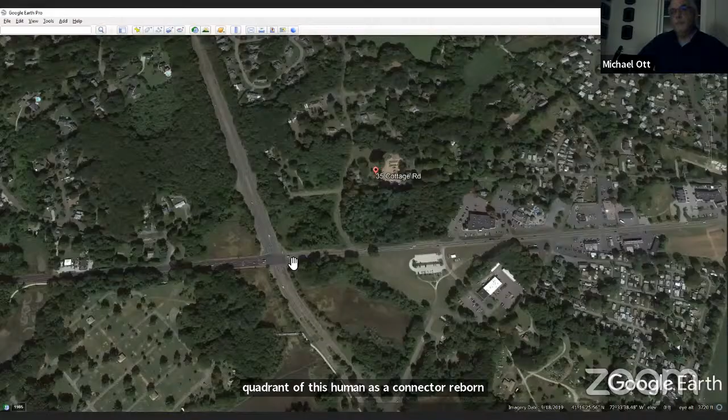And then there are small areas of tidal wetland to the northwest, in the northwest quadrant of the Hammonasset Connector Route 1 intersection. And there's another small one here. Let's see if I can zoom in a little bit. So there's another small wetland here in the northeast quadrant of this intersection. And the reason I'm pointing this out, and this is in our report, the municipal storm drainage system within Mill Road and within the westerly portion of Cottage Road actually discharges to this tidal wetland here.

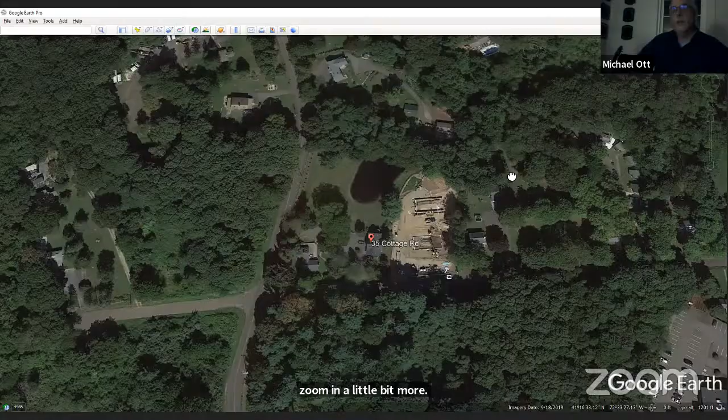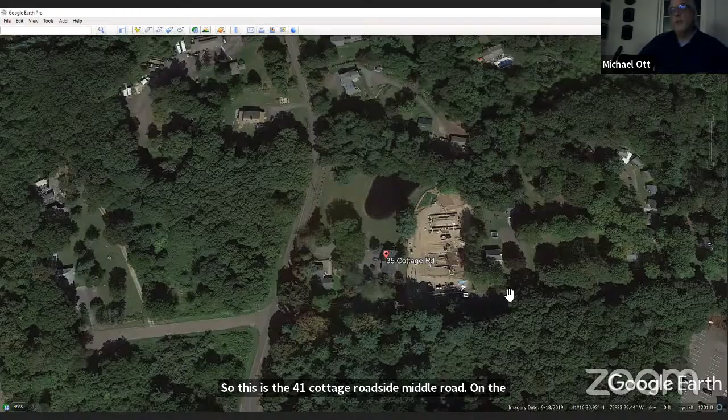So if I zoom in a little bit more, hopefully you can see this clearly. It looks like this aerial image was taken when the development at 35 Cottage Road was under construction. It looks like the foundations were in at the time, as you can see, of the two buildings. So this is the 35 Cottage Road site, Mill Road on the left, Cottage Road, hard to see with the tree canopy, but Cottage Road right and left across the bottom of the screen. This is the existing home. It was a home at one time, later an office on the site, and this is the existing garage and office on the site. Those two buildings are still there.

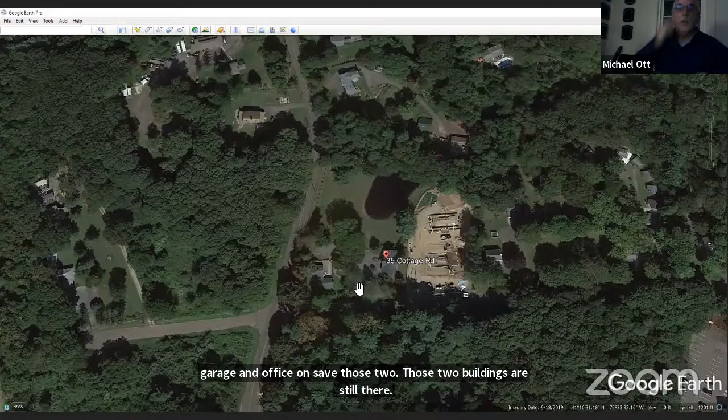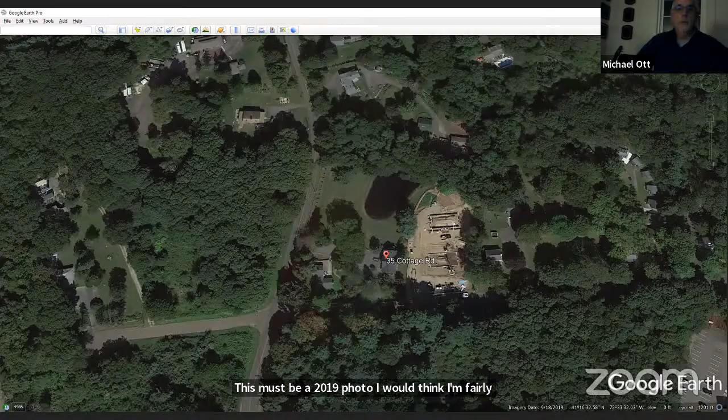So this must be a 2019 photo, I would think. I'm fairly sure. So I'm going to switch screens, and hopefully you'll be able to see the switch without me stopping sharing and resharing. Can you see the plan set now on your screens? No? Okay, let me stop sharing and do it again. I think that'll solve it. How about now? Yep, okay.

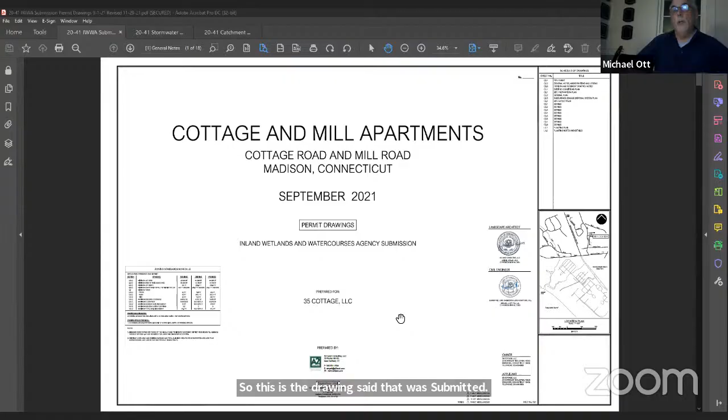So this is the drawing set that was submitted. It's the latest set, revised to November 29th. I'm going to go to the existing conditions plan.

Mill Road on the top, left and right on the top of the sheet. Cottage Road up and down on the left side. If you continued up Cottage Road, that's the westerly extension that almost goes to the Hammonasset Connector. It used to go over to Signal Hill Road before the connector was constructed. If you followed Mill Road to the south, you'd come out at Route 1, and the entrance to Hammonasset would be diagonally to your right as you sit at Route 1.

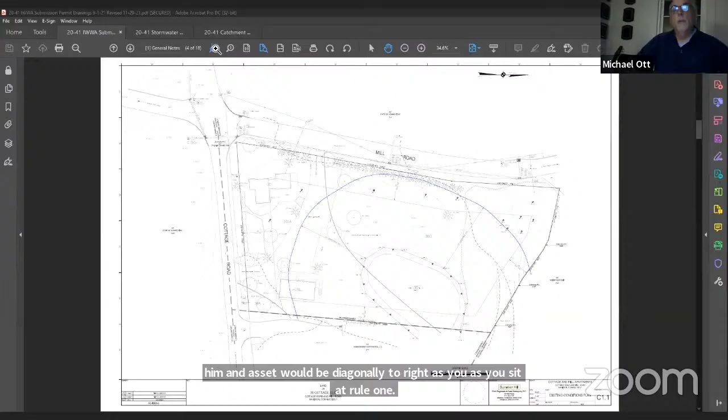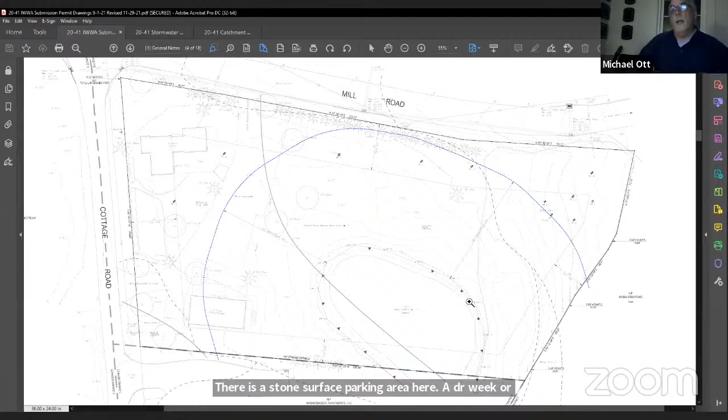So the site, I think you're all familiar with it. This is the previous home that later became an office, this is the garage office. There's a stone surfaced parking area here, a driveway curb cut on Mill Road, a driveway curb cut on Cottage Road, and the pond on the property. The surface area of the pond at its high water elevation is about 12,000 square feet.

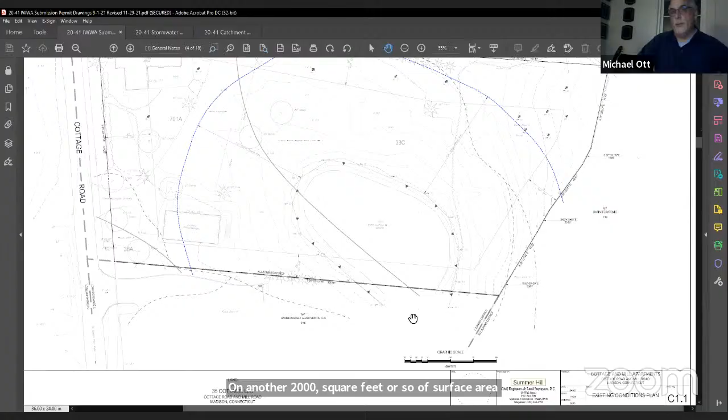Another 2,000 square feet or so of surface area at high water elevation is located on the 41 Cottage Road site. So the property boundary between the two sites cuts across the pond, as you all probably know. The pond, to the best of our knowledge, is an excavated pond. In talking to the previous owners some 30 or so years ago, they simply excavated and intercepted the groundwater table.

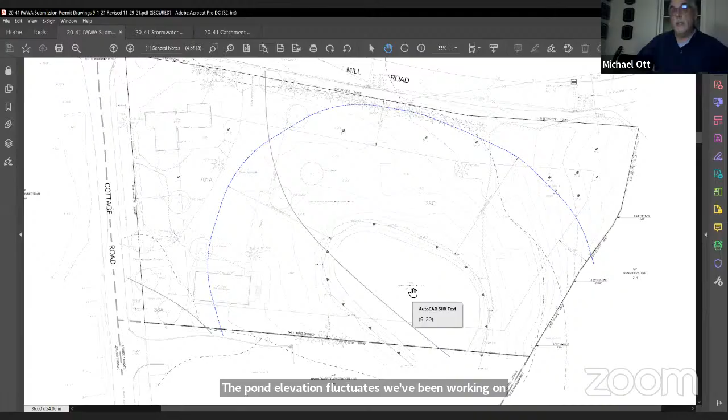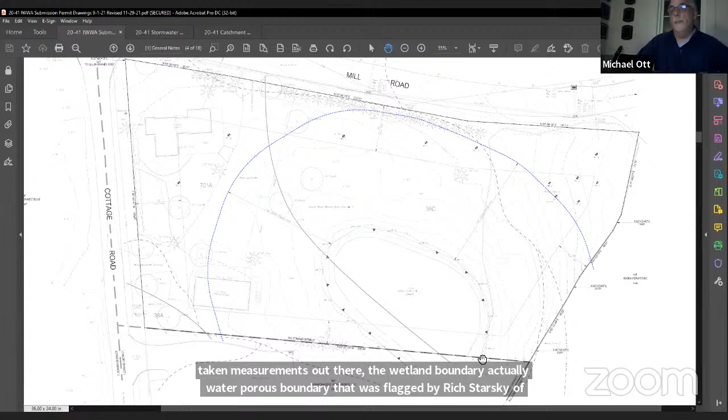The pond elevation fluctuates. We've been working on these two sites for the past 3 years now, and we've seen the pond as low as elevation 3 and as high as elevation 5 at different times that we've taken measurements out there. The wetland, actually watercourse boundary that was flagged by Rich Snarsky of New England Environmental Services, is actually the high water elevation of the pond. It's pretty readily seen just walking onto the site, pretty obvious where the normal high water elevation is.

The total parcel area is 1.94 acres. Some letters from residents have indicated the property is 1.1 acres. I think that's just confusion, because in my report I noted there's 1.1 acres within the 100-foot upland review area limit, which is this blue line. So the total area of the site is just under 2 acres.

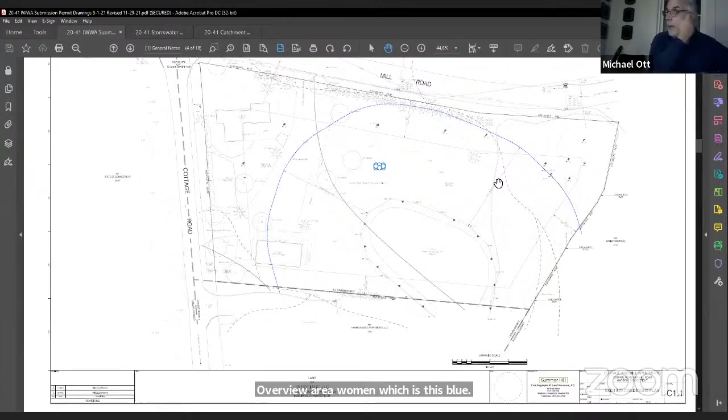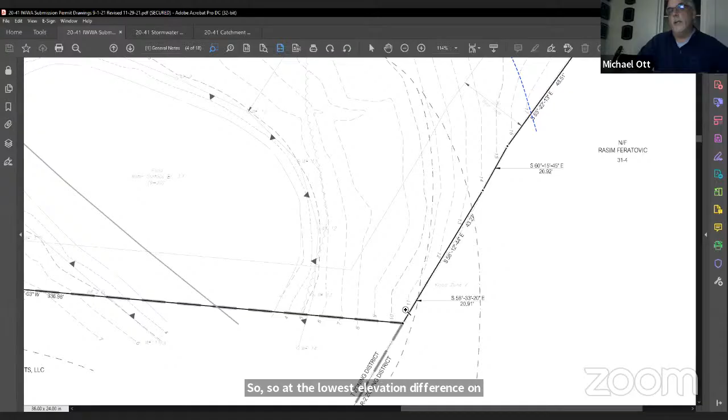The site, and I studied this again today, and walked the site again last week, the surface water runoff is completely contained on the site. No portion of the site drains off-site to Mill Road, to Cottage Road, to the 41 Cottage Road site, or to the 42 Mill Road residential home to the north. So surface water runoff is completely contained within the site. If I zoom in here, you can see with the high water pond elevation of 5, the lowest elevation in this corner here is about 11.

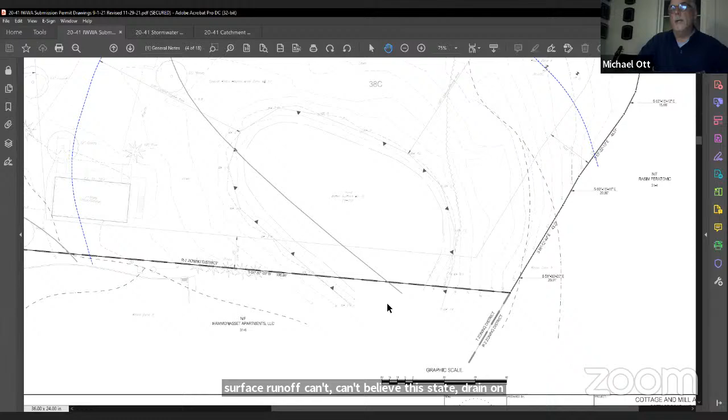So at the lowest elevation difference on our site, the ground surface is 6 feet above the high water elevation of the pond. Similarly, although we don't have the topography yet, we will shortly, on the adjacent 41 Cottage Road site, by my inspection last week, this topography continues and the site is much higher than the pond. So surface water runoff can't leave this site and drain off-site to the two roads or to adjoining properties.

So I'll try to make this quick. I know you've heard this before, but as Attorney Shansky said, it was not in the context of a public hearing, so I guess we have to go through this again.

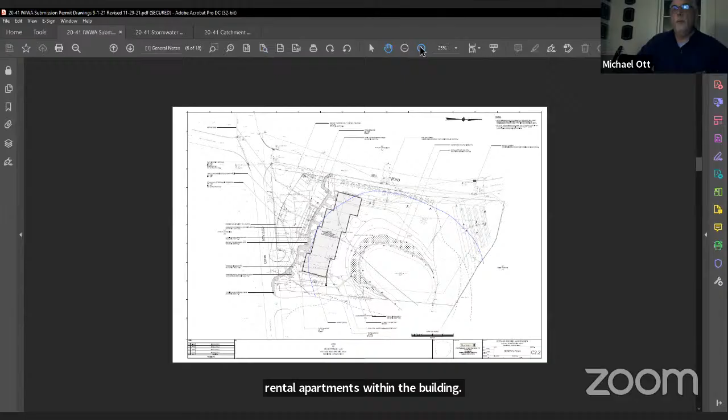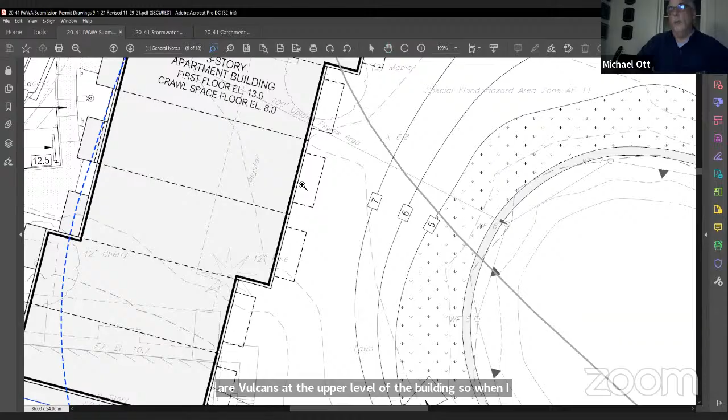The proposal, as you know, is for a single 3-story building. The footprint of the building is, in round numbers, 7,800 square feet. There will be 18 one-bedroom rental apartments within the building. The face of the building is at its closest point 50 feet from the watercourse boundary. These dashed lines are balconies at the upper level of the building. So when I note the 50-foot distance, I'm talking about the face of the wall, the building proper, at its closest point, 50 feet from the current watercourse boundary flagged by Rich Snarsky.

Parking area in front, 27 total spaces. Curb cut on Mill Road, curb cut on Cottage Road. Both of these curb cuts are very close to, or partially within, the existing curb cut locations. I'll go to stormwater management last, I think.

The on-site wastewater system is comprised of a very large septic tank, a wastewater effluent pump chamber, a sanitary vault that contains valves, and a force main that lifts the wastewater effluent up about 8 feet in elevation to a leaching field in the northwest corner of the site.

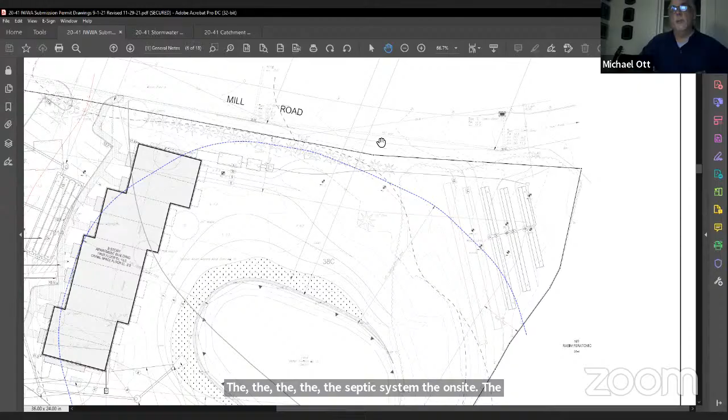The septic system, the on-site subsurface sewage disposal system, has been designed to meet the requirements of the State of Connecticut Public Health Code technical standards. It's considered a large system because it has a design flow equal to or greater than 2,000 gallons per day. The design flow here is 2,700 gallons per day.

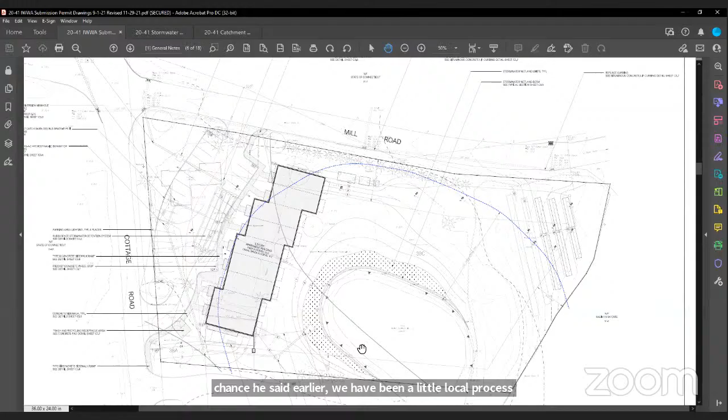Because it's a large system as the state public health code defines them, the local health department has to review and approve it, and then it has to be sent to the state health department for their review and approval. As Attorney Shansky said earlier, we've been through the local approval process, and the health department is now in the process of sending it up to the state health department for review.

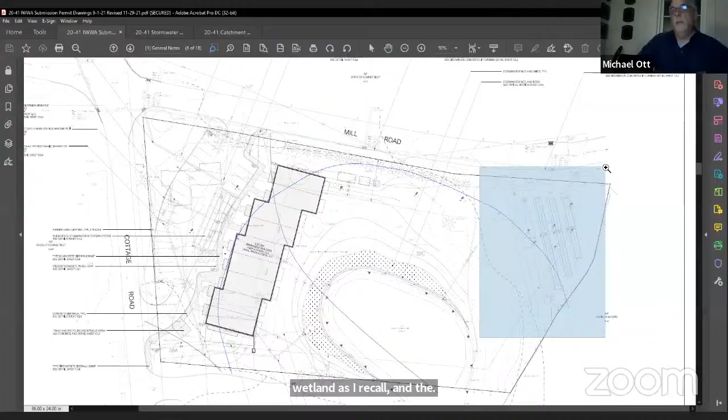The tanks are some 75 feet or so from the wetland, as I recall. The primary leaching fields—these three, with the lowest row being closest to the wetland—are, at their closest point, 92 feet from the watercourse boundary that Ridge flagged.

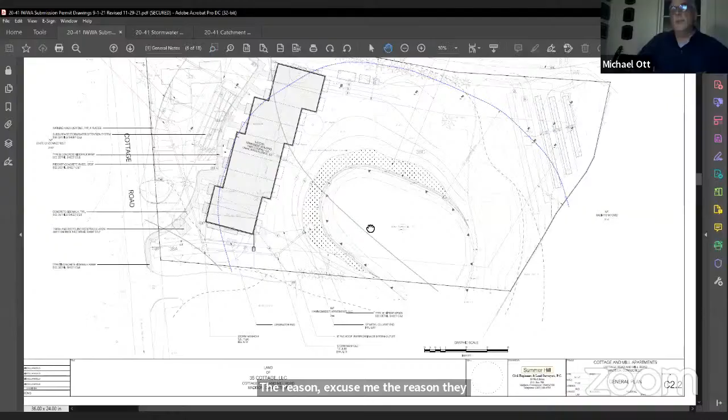The wastewater system is located in this corner to place it as far away as we could from the watercourse boundary, the pond edge, and to locate it where the best soil and groundwater conditions are on the site. After soil testing, including excavation of test pits, that turned out to be the right place to put it. So we've got it as far from the pond as possible, and in the proper location where the soil and groundwater conditions are correct.

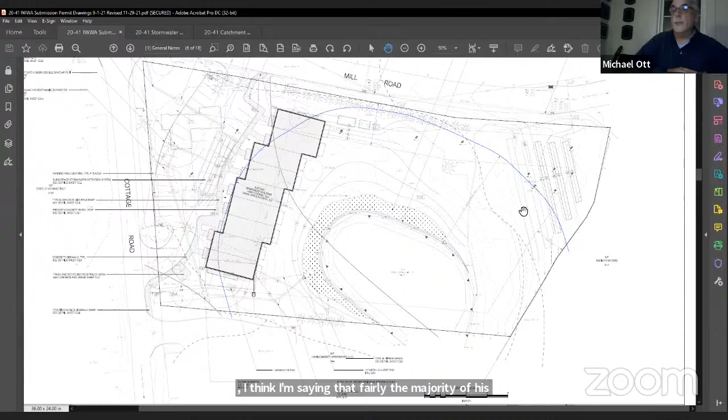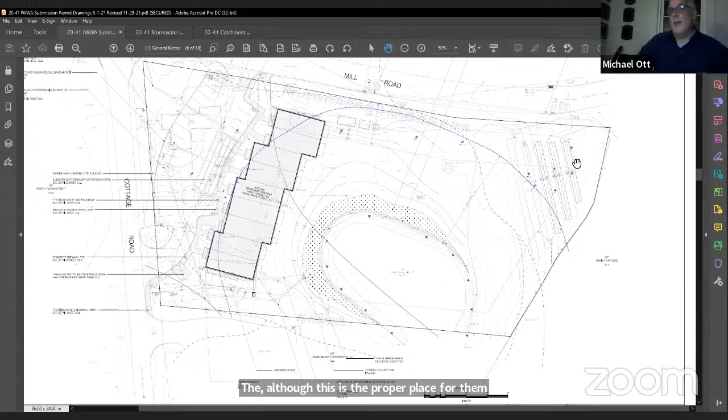Although this area is wooded, our landscape architect and environmental consultant looked at it, and the majority of the vegetation is invasive species, including a lot of ailanthus, or tree of heaven, as it's commonly known. The plan is to remove all of that, expose a nice-looking stone wall along the northerly boundary, and then replant the area in accordance with the landscape plans. So while this is the proper place for the septic system, a secondary benefit will be removing the invasive species and replanting this area.

There's an extensive landscaping plan, as you know, that Abigail Adams, our landscape architect, will go over, so I won't cover that.

The parking area is all limited to the front, on the Cottage Road and Mill Road side. There's a continuous sidewalk along the parking lot and the two driveways from Mill Road to Cottage Road, with small sidewalks at the building entries connecting out to the main sidewalks. The parking area is paved bituminous concrete with precast concrete curbing all the way around, and there will be exterior pole-mounted lighting for the parking area.

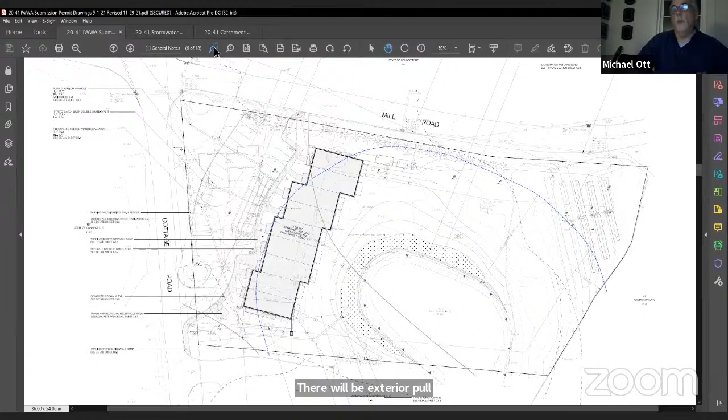I know some of this isn't really germane to wetlands, but I'm just trying to give you an overall view of the whole site proposal. What is germane, of course, is the stormwater management system.

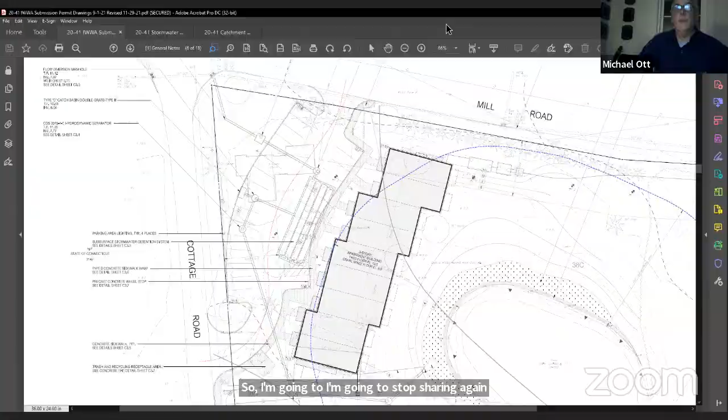So I'm going to stop sharing and switch screens. Hopefully you can see a different drawing now—this is a catchment area map. Can you see the change?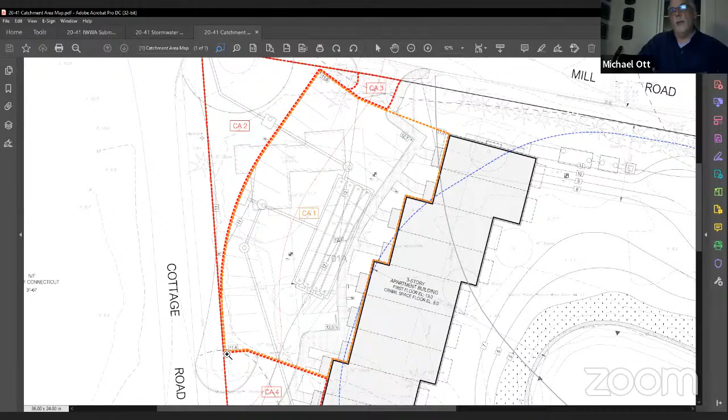This area outlined in orange runs to the building corner, along the face of the building, across the driveway, and then follows the curb line of the parking lot. So it's this total area, which includes the parking lot, the vast majority of the concrete sidewalks, and the small grass areas between the building and the sidewalks—about a quarter of an acre.

So that whole area, from the face of the building to the curb line of the parking lot, is connected and goes into the stormwater management system. This small area labeled CA3, which is only a few hundred square feet, drains out to Mill Road. And this, of course, is in the proposed condition.

So this piece of pavement of the driveway drains out to Mill Road, and surface water will go down the gutter and into this existing catch basin with the red circle around it. On the other end of the site, this area labeled CA4, which is bigger and includes the paved driveway, some lawn and landscaped area, some lawn here also, as well as this piece of sidewalk and this building entry roof, will drain out to Cottage Road.

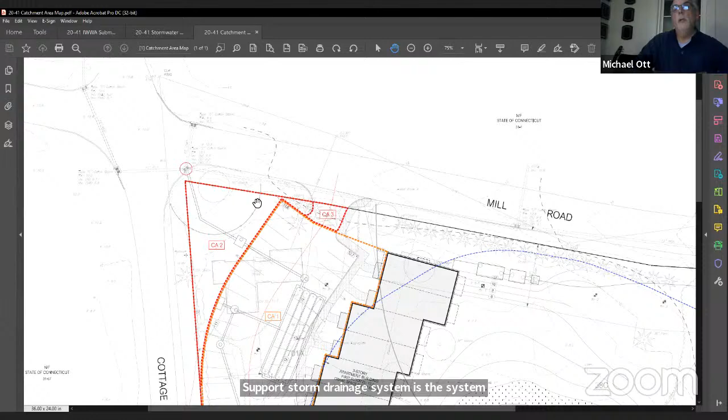The municipal storm drainage system is the system I mentioned earlier that discharges to the tidal wetland at the northeast quadrant of the intersection of the Hammonasset Connector and Route 1. That's why I pointed that out. So this municipal storm drainage system that's in place today discharges to that northeast quadrant.

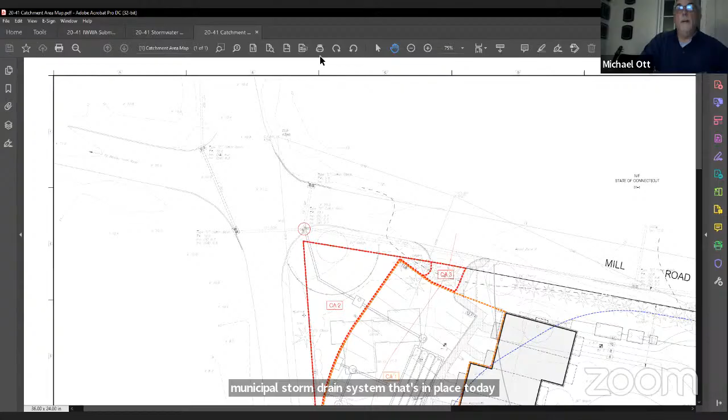In addition, this area, CA2, this sort of triangular area, which will be all lawn and or landscape plant beds, will also drain out to both Mill Road and Cottage Road and go into this catch basin.

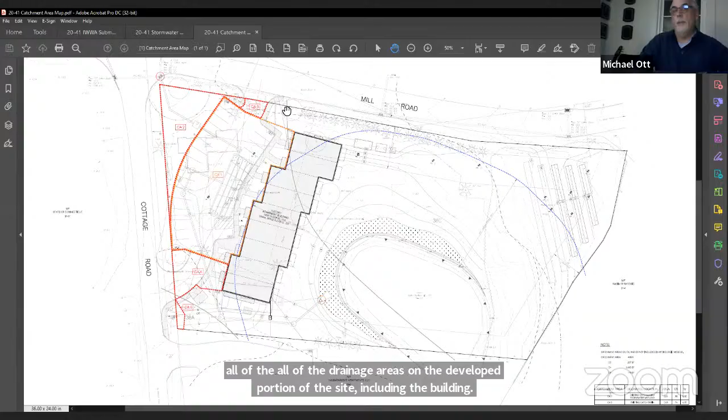So all of the drainage areas on the developed portion of the site, including the building roof, are relatively small. And when you model them in accordance with standards of practice, the hydrologic models indicate that the highest peak rate of discharge is a little over 2 cubic feet per second. And that's very low, a very low rate of discharge for development.

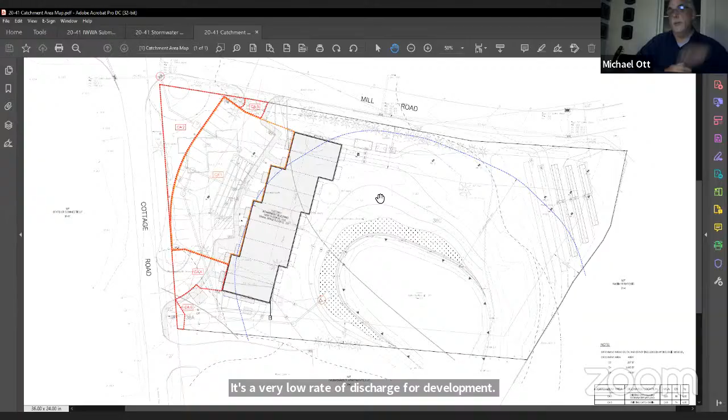It's just the rate of discharge and it's just the peak. But I want to give you a sense - if you look at the stormwater management report, you'll see that because of the small size of these catchment areas, the peak rates of discharge are very low, even for the 100-year event.

When we modeled the peak rates of runoff, we assumed that this whole orange area was paved. It's not, but as you can see, there are areas of grass here. We just assumed it was all paved, so it's a little more conservative.

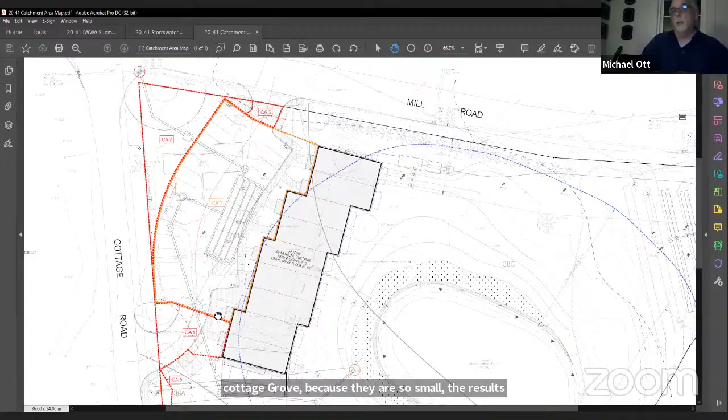And we did not model this little CA3 area or this CA4 area or this little lawn area CA5 that I forgot to mention also will go out to Cottage Road. Because they are so small, the results of the model are truly meaningless - the areas are so small they have no effect on the municipal storm drainage system.

So this whole large orange area is collected in this one catch basin in a single low point in the parking lot. When the stormwater leaves that catch basin, it goes into this manhole structure here, which is a flow diversion structure.

There are details for this on the plan, and in simple terms, what it does is it directs the water quality flow, a certain flow rate, this way to the right. So it comes out of the catch basin, goes into this flow diversion manhole, it hangs a right, and it goes into this manhole, and then it follows the storm sewer system down to this manhole, to this manhole.

To this constructed wetland, this constructed stormwater wetland that we plan to construct around the fringe of the pond. And that's what this hatched area is. I'll get back to that in a second.

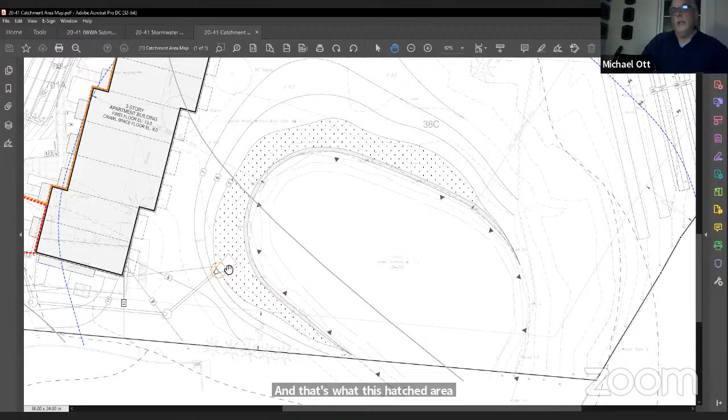So in accordance with the procedures in the Connecticut DEP Stormwater Quality Manual, this flow diversion manhole has been designed to ensure that the water quality flow rate, and therefore the water quality volume for the site, enters this storm drainage system and ultimately goes to this constructed wetland.

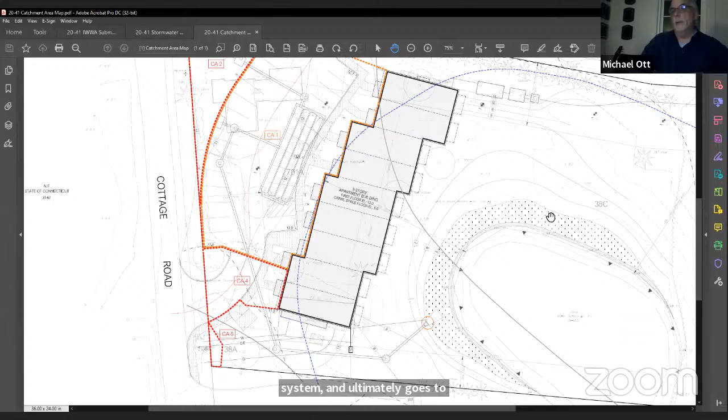What I forgot to tell you is that in its path as it goes to the wetland, this first structure right here is a stormwater treatment structure. It's a manufactured stormwater treatment structure, a hydrodynamic separator type stormwater treatment structure. There are details for it on the plans, and it's talked about in the stormwater management design report.

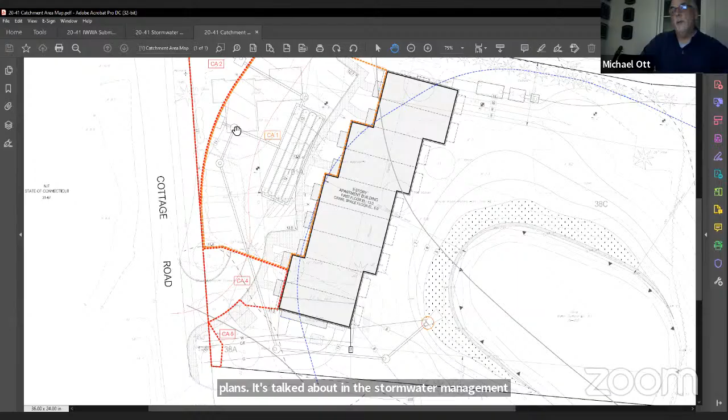So that water quality flow rate is directed through this pipe to this stormwater treatment structure, which provides water quality benefits. And then the stormwater, after it leaves, follows this piping alignment down to the constructed stormwater wetland. The constructed stormwater wetland is considered a primary treatment practice in the Connecticut DEP Stormwater Quality Manual.

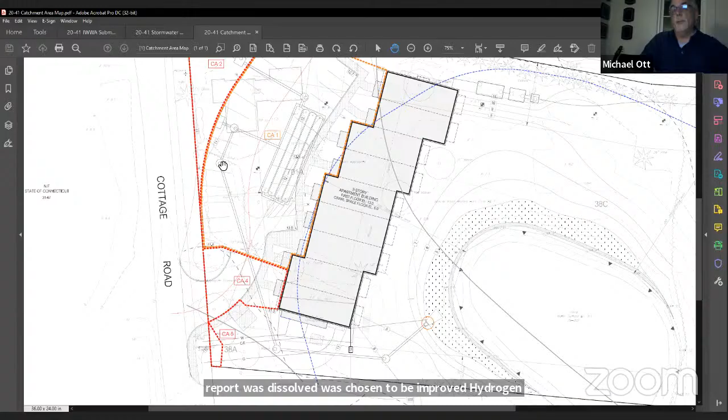The hydrodynamic separator, the stormwater treatment structure, is pre-treatment for this wetland. Prior to the wetland, it's considered a secondary treatment practice. The hydrodynamic separator, as it says in our report, was chosen to be an approved hydrodynamic separator by the Connecticut Department of Transportation, sized properly to treat the water quality flow rate from this orange drainage area and also have the required sediment storage for this orange drainage area.

So before parking lot and sidewalk water goes to this wetland, it goes through this stormwater treatment structure first, then it goes to the constructed stormwater wetland around the edge of the existing pond. The building roof water goes directly to the stormwater constructed wetland.

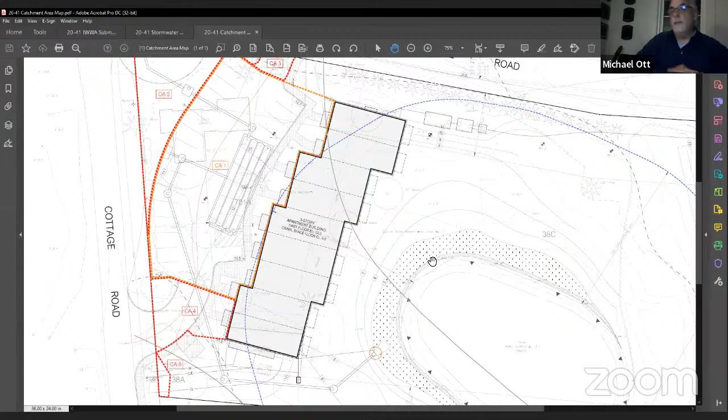The reason, if you remember, is that for residential building roof material types and a residential building use, in other words, not a commercial use with some process in the building that would be vented to the roof and potentially put pollutants on the roof, for this type of residential roof type, the Connecticut DEP considers roof water to be clean in terms of stormwater quality. It is being treated because it goes into the stormwater wetland, but it does not have to be directed through the stormwater treatment structure.

The remainder of the site, again, remember this site's surface water runoff is completely contained in this site. That surface water drainage pattern won't change. So all the other areas of the site will drain towards the pond as they do today.

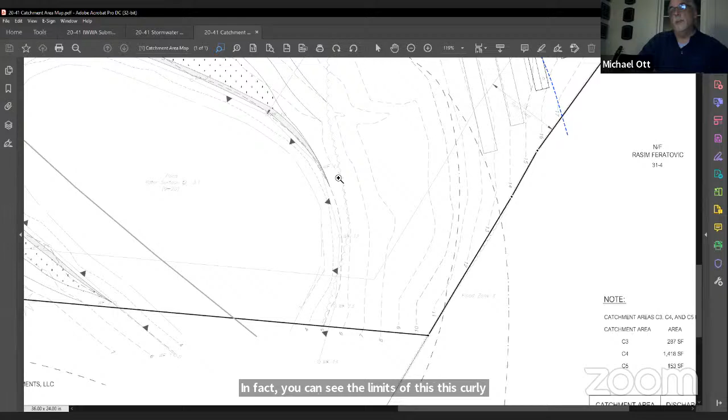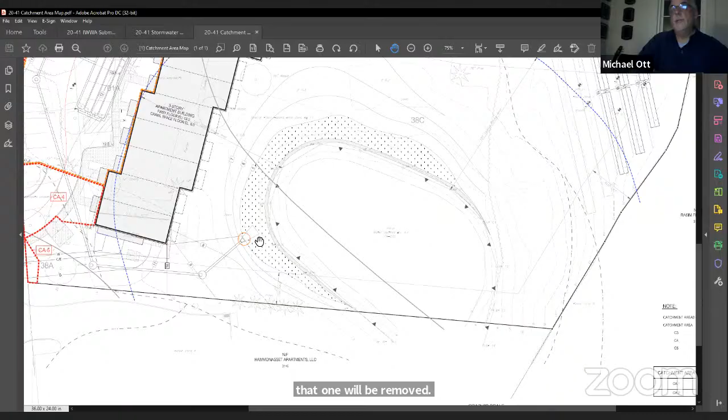A big difference will be today, as you know, there's a maintained lawn literally right up to the edge of the pond, almost all the way around it. It's wooded back here. In fact, you can see the limits of this curly line is the limits of the wooded area, and I'm sure you've all seen this, the vast majority of the perimeter of this pond is a maintained lawn. In the proposed development, that lawn will be removed, and not only will this wetland be constructed, but the landscape plan that you'll hear about later will plant this area around the constructed stormwater wetland also.

So utility services come in from Cottage Road over here. There is a generator. There's a pad here on the site right here for a generator for the building.

Trying to make sure I give you a good overview here. There's been some, although these are not issues related to the wetland application, I might as well mention them now. There's been talk about flooding in Cottage Road. We're aware of the ponding of surface water runoff in Cottage Road.

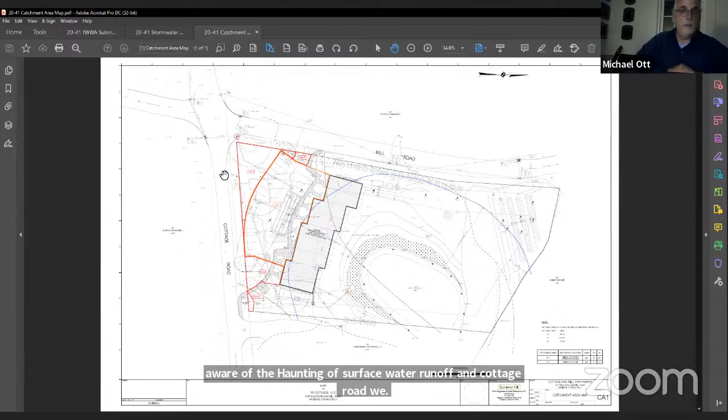Several months ago we met with town staff and shared photos that we took that show the ponding in Cottage Road. That ponded water does not enter this site. Some of it leaves to the south and drains off the road pavement onto the state land across from the site.

Some of it makes its way into these two catch basins on either side of the intersection. Some of it just sits in ponds and ultimately infiltrates at the edge of the road, which happens on a lot of roads where water ponds along the edge. It just takes some time and then it infiltrates. So water from Cottage Road does not enter this site.

Surface water runoff from Mill Road enters this site. There is no curbing, only short sections of curbing at this catch basin and at this catch basin. So surface water runoff potentially can, I should say, leave Mill Road and enter this site.

I can't tell you that it actually does. The soil, the earth along the edge of the road may be high enough to have effectively created what we call a dirt curb, and it may keep the water in the gutter, and it may make its way all the way down here, but it does have the potential to come onto the site. That, unlike Cottage Road, just the topography is such that the Cottage Road water can't enter this site.

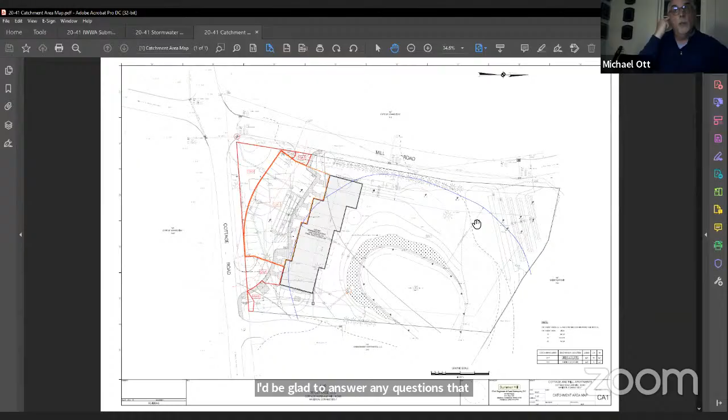I think that's a pretty good overview of at least the civil portion of this, the site characteristics and the civil portion of the site. I'd be glad to answer any questions the agency members might have, or just turn this to, if you'd like, to Abigail Adams, our landscape architect.

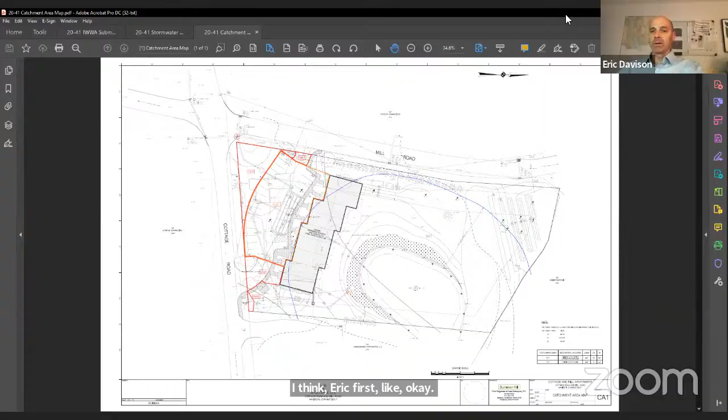I think Eric first. Mike. Okay. Hi, everybody. Can everyone hear me okay? Yes. My name is Eric Davison.

I'm a wildlife biologist and a certified professional wetland scientist here in Chester. I also, like you folks, am a commissioner on my local wetland commission here in town, so I know what you have to go through with these meetings.

So let me briefly review what we had gone over in the initial meeting, to describe the wetland that's on the site. As you have in your filings, I drafted a report back in September that includes all the information that I'm just going to quickly summarize about the wetland. So as Mike mentioned, it's about 14,000 square feet in size, the pond. It has no connection to any other wetlands and watercourses. It is completely isolated on the landscape. In terms of the hydrology, as Mike noted, it fluctuates approximately 2 feet in elevation during the growing season.

That's due in part to the surficial geology of the site, which is coarse grained sands and gravels that allow water to move through the soil in a way that you get greater fluctuations in pond depths, generally when they're in sand and gravel as opposed to till.

During the drawdown period, there is a narrow fringe around the pond when you get that 2 foot drop, and you get a small exposed hydric soil border. The maximum depth of the pond, based on our dip net and seine sampling, exceeds 5 feet. That's about as deep as I was able to get to without going for a swim with my chest waders on.

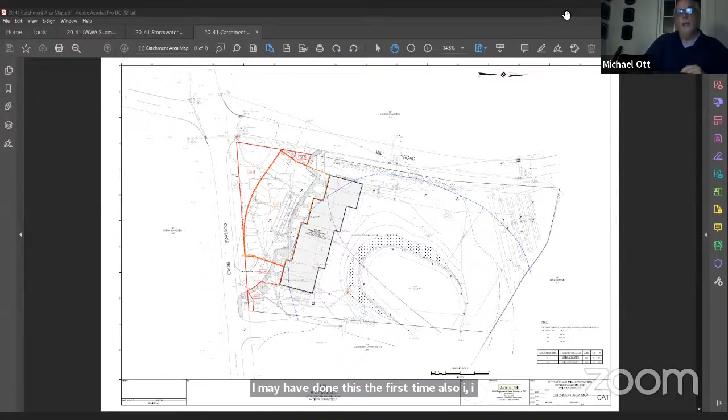Mike just wanted to add one additional thing about the stormwater management, and then I'll go. Thanks, Abigail. I apologize, I may have done this the first time also. And Eric, actually what Eric just described is kind of a lead into this.

I spoke about the water quality aspects of the stormwater management system, but I forgot to speak about the less frequent, greater depth rainfall events and the control of peak discharges. So as we talked about last time, the water quality volume goes out and down to the constructed stormwater wetland, but the discharge of stormwater from the less frequent greater rainfall depth events is directed at this flow diversion structure into this subsurface detention system below the parking area.

There are details for all of this on the plan, and it's described in the stormwater management report, but it's comprised of manufactured chambers that provide a storage reservoir beneath the parking area and a piped outlet here to an outlet control structure that controls the rate of release of the stormwater from this subsurface system.

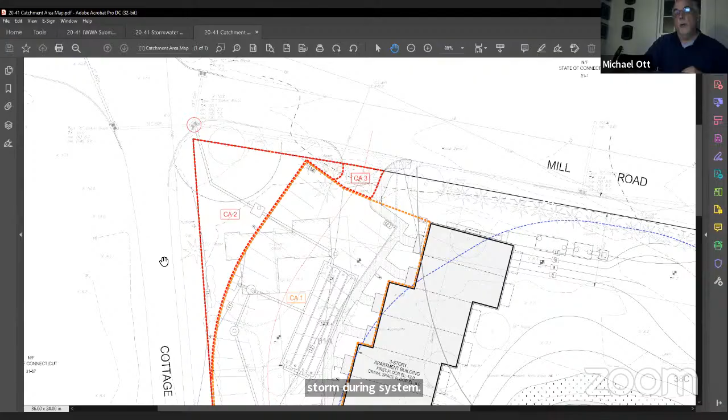Currently, the way we have this designed, the outlet pipe from this outlet control structure passes through the root system of this very nice large beech tree on the corner, and it makes a connection to the municipal storm drainage system. As you know, ultimately that storm drainage system goes to the tidal wetland. A couple things we wanted to say about that.

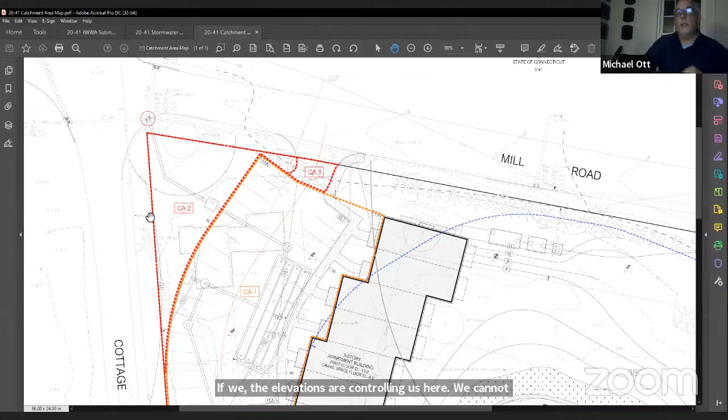The initial reason for doing this: the elevations are controlling us here. We cannot route this pipe in a different manner and have it reach, by elevation, into this catch basin. The storm sewer elevations in this catch basin are fixed, of course, and we cannot lengthen the pipe by traveling an alternate route to stay away from this tree to get into this basin.

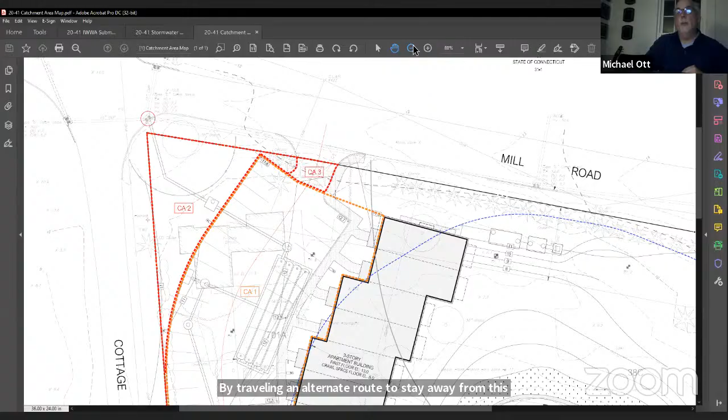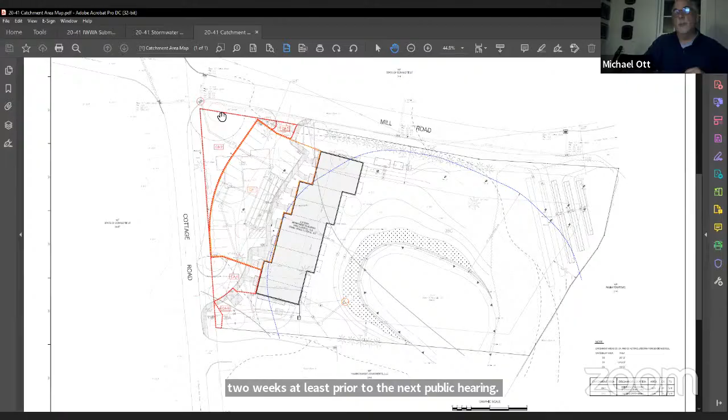This aligns with what Eric was just saying. What we've decided to do, and we haven't had time to make this revision yet, but we will prior to, of course, two weeks at least prior to the next public hearing, is eliminate this storm sewer connection so that we don't have to go through the root system of the beech tree, and instead direct the stormwater from this detention system back to this wetland and to the pond.

As you probably remember, we tried to take measures and steps to protect this during construction by hand excavating and using an air spade, not having a structure at this change in direction, just a bend in the pipe.

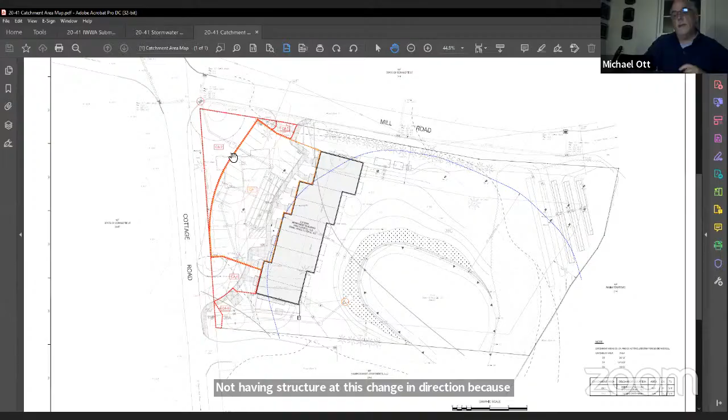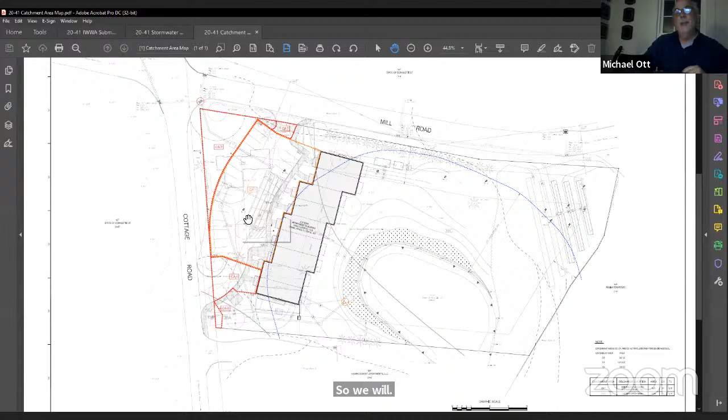But after some discussion, and understanding there's great concern about the tree, we're concerned about it too, which is why we took those steps. We've found a way to eliminate this connection, so there will be no stormwater runoff discharge to that tidal wetland at the east quadrant of the Hammonasset Connector Route 1 intersection. All stormwater runoff will stay on the site as it does today. I apologize, I completely forgot to mention this, but we will be making that revision in time for everyone to review it prior to the next public hearing.

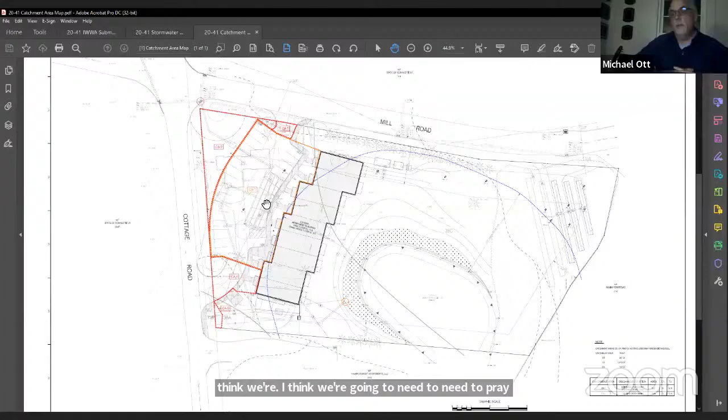I wanted to say, since Eric brought up the review letter we received at 4 o'clock or so today, I haven't had a chance to read it thoroughly and don't want to comment on it now. However, I do want to say one thing, because I think we're going to need to pursue some written clarification from the State of Connecticut on this issue, regarding the design of subsurface sewage disposal systems.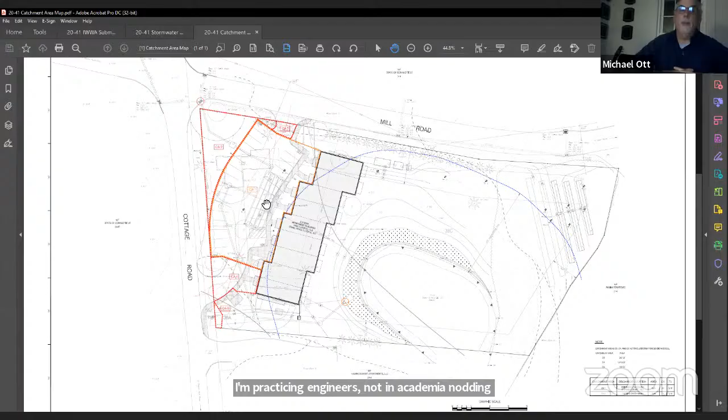As said before in a previous land use application this agency heard, practicing engineers, not in academia, not in research, just practicing civil engineers, design subsurface sewage disposal systems that are regulated under the state public health code. We design them to meet those requirements and standards, which apply throughout the state. I've had several conversations in the past several months with the state health department to make sure I haven't misunderstood this over the years, or that something has changed.

So I confirmed with the state health department that the design criteria for sewage disposal systems regulated by the Connecticut DEEP do not apply to subsurface sewage disposal systems regulated by the Connecticut Department of Public Health. The state Department of Public Health has deemed these systems protective of the environment and human health, as long as they're designed properly and meet all requirements of the state public health code.

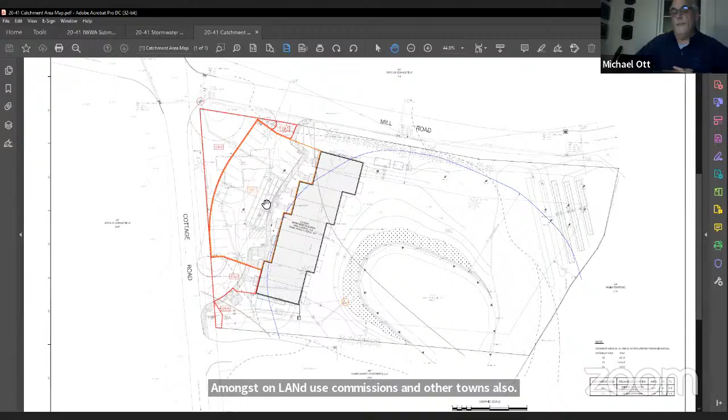This very same issue came up during a previous land use application. It's caused a lot of confusion amongst land use commissions in other towns also. I know it's kind of a tricky issue. People ask why aren't more advanced alternative treatment systems proposed?

The current regulatory framework is such that the State Department of Public Health cannot and will not entertain an application for an advanced or alternative treatment system for these types of systems, for these design flows that are regulated by the state public health department. So I wanted to say this early.

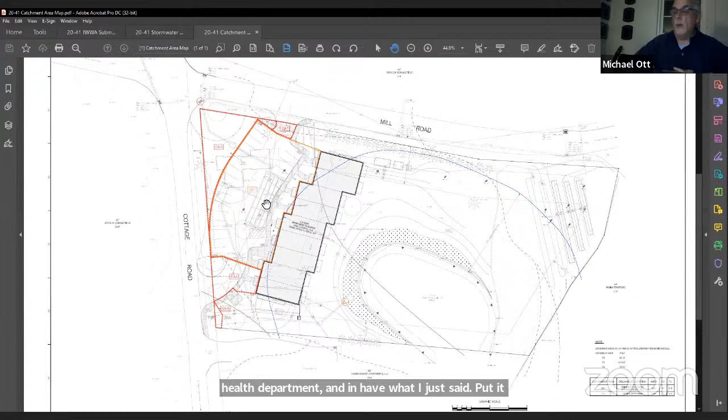I think, given what I've seen in the report that came in at 4 o'clock today, we are going to go back, probably through the town's health department to the state health department, and have what I just said put in writing for the agency, so that the agency has it from the state authority having jurisdiction over these types of systems. That's all I wanted to say. I apologize for forgetting about the subsurface detention system, and I'll turn it over to Abigail.

Should I stop sharing, Abigail? I think you're muted. I am. Thank you. Thanks, Mike. I will share my screen also. Let's see here. Is it up?

Can you see my screen? Great. Good evening. For the record, my name is Abigail Adams, registered landscape architect, owner of A2 Land Consulting LLC, New Fairfield, Connecticut.

As Mike and Eric have previously mentioned, currently a large portion of the overland flow on this property is across lawn into the pond, with the manicured lawn all the way up to the pond edge. This plan proposes to remove a significant portion of that lawn area and create very large buffer planting areas. Let me zoom in a little bit here.

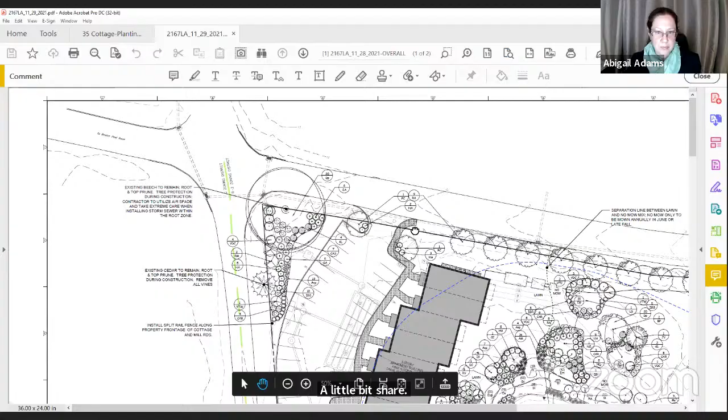There we go, that's a little bit better. Okay.

These areas contain a mix of both deciduous and evergreen native shrubs. In the created wetland areas, we're proposing a very large variety of herbaceous material for enhancement, both to the habitat and the water quality on site.

The portion of the site closest to the developed units would be maintained lawn area with some little pockets moving through down to the created wetland edge, and then these larger pockets of native plantings here.

It would clean any of the overland flow water before it enters into the pond.

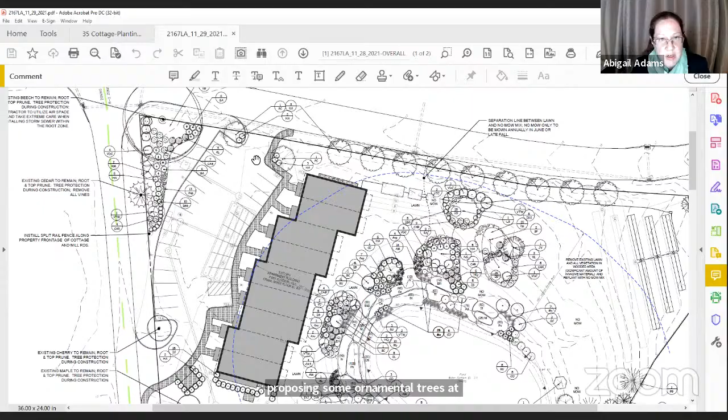We are also proposing some ornamental trees at the entrance along Mill, and then maintaining an existing cherry and an existing maple on this portion of the property.

We have some screening proposed along the refuse and utility areas of the building. We're also proposing a row of evergreen green giant arborvitae for screening between the two developments, so that this lawn area has a little bit of privacy from the development to the east.

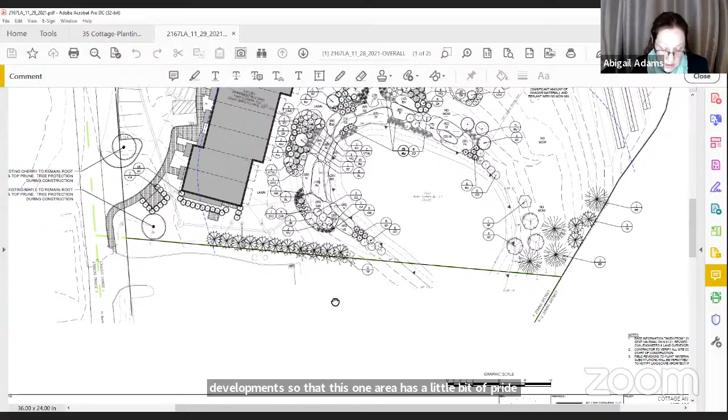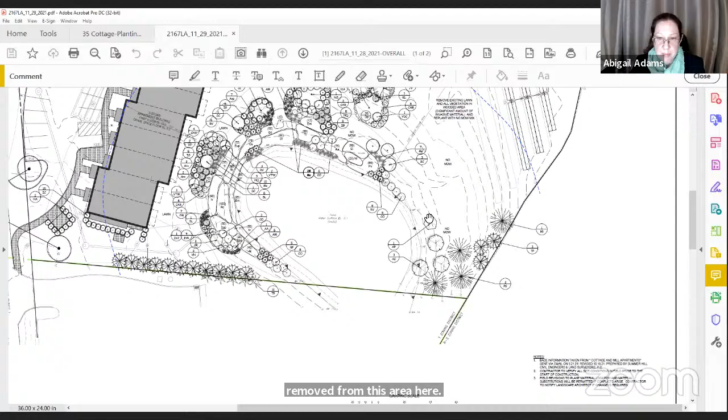On the northeast corner, we're proposing some additional evergreen trees to replace some of the invasive material being removed from this area. We're proposing some white spruce, some green giant arborvitae, some buckeye and shadblow, planted sporadically throughout the no-mow mix, with our tighter plantings happening along the created wetland and pond edges as noted before.

Overall, the planting plan provides an extensive variety of native plantings that are not currently present on the site. This plan provides wetland enhancement by increasing the wildlife habitat, coverage, and food sources for the wildlife that has been seen throughout the neighborhood.

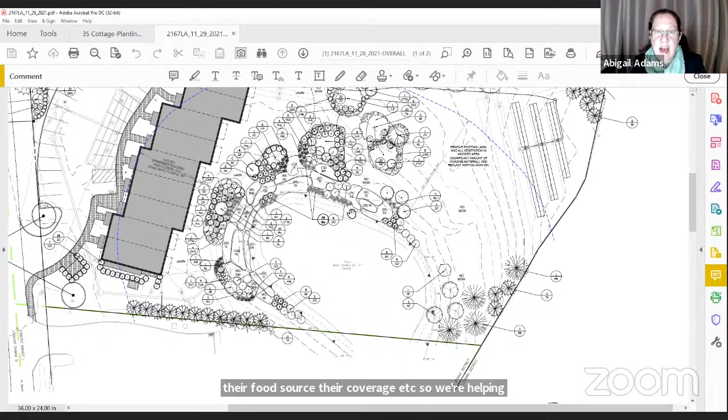I know there are multiple animals that have been listed, and this planting plan only enhances their food source, their coverage, etc. So instead of lawn, they actually have somewhere where they can go rest and snuggle up next to the evergreen trees, or the birds.

Birds love having evergreen trees near wetland areas. Just for scope, I want to provide some numbers to the magnitude of what we're actually proposing in terms of plantings.

We're proposing 13 canopy trees, 3 ornamental trees, 24 evergreen trees, 258 shrubs, and over 1,200 herbaceous plugs and plantings.

That range from tussock sedge, blue flag iris, arrow arum, pickerel weed. We have New England aster, blueberries, arrowwood viburnums.

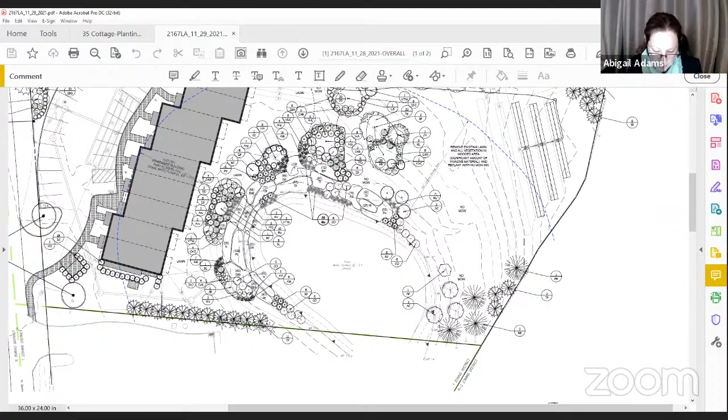Winterberry. We just have a very extensive and robust amount of planting on this plan in order to enhance the ponds that's already out there, and to make this a viable, attractive, and nice development for this parcel.

I wanted to agree with Eric, where we already have this developed piece of parcel, that it makes sense to utilize and enhance something that's already there, and just make it, in our minds, better and enhance what's there for the wildlife as well.

I think I picked up on all of the main points of the planting plan. I know between Eric, Mike, and myself we provided a lot of information, and they also covered a lot of the things I was going to state. So I think we've covered most of it here.

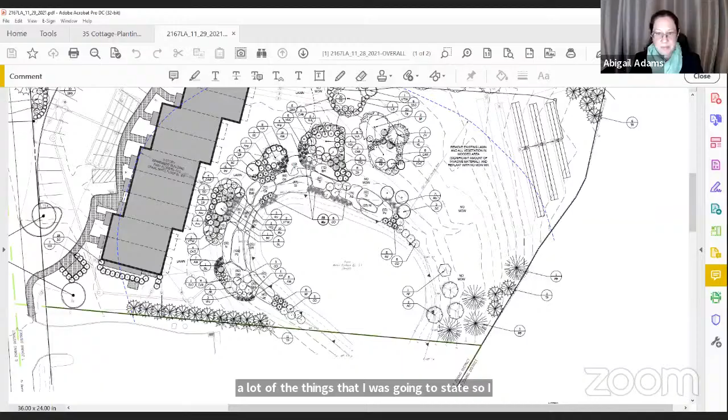I'm sure we have questions. I'm just looking at the time. So, Aaron, what do we need to get through here tonight? I'm trying to figure out our timing. I'm happy for us to ask questions, I'm sure the agency has questions, and I'm assuming the intervener is also going to want to intervene. And then, of course, we have a significant number of people waiting to speak.

Correct. So I think the commission would need to determine a time where they're comfortable allowing the presentation to continue or questions to be asked. You do, just from a housekeeping standpoint, have one other application before you this evening, and we're coming into 9 o'clock. So yes, I think clearly we all want to try to get as much on the record as we possibly can within reason. So maybe just a consensus from the agency members themselves on your willingness to extend for however much longer, and then we'll try to squeeze in as much as we can within that time period.

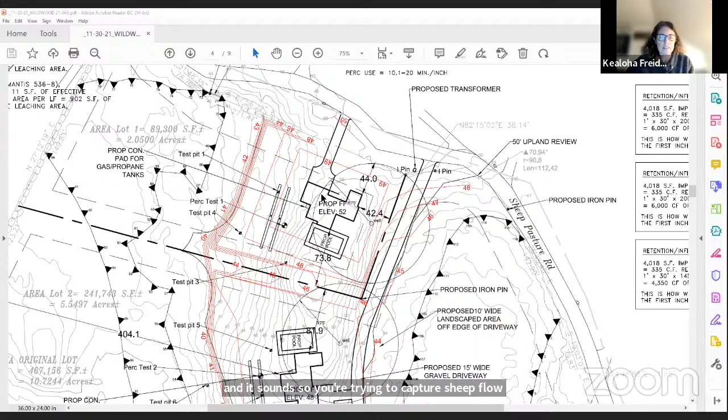And it sounds like you're trying to capture sheet flow into these swales, is that correct? Yeah, we were counting them as we were using them to double as the 1 inch of stormwater retention. Chris Ozick does a lot of work with the swales, he can describe the functionality of them a little better. Chris, do you want to add some?

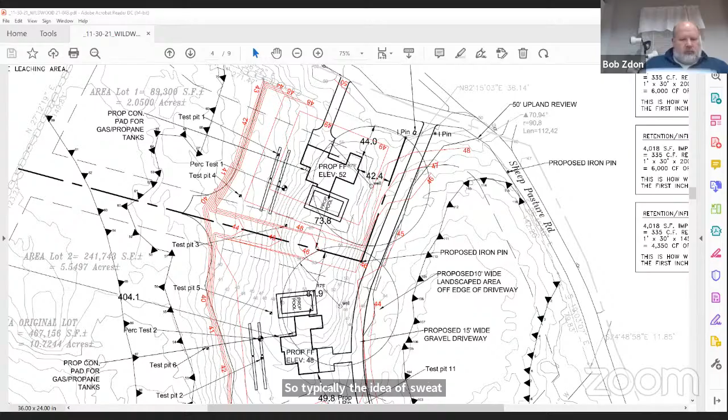Yeah, so typically the idea of the swale is that you're going to catch your sheet flow off your lawn areas, potentially off your building areas, and you're able to cool the water, retain sediment, and it also acts as a passive watering system for what you want to be a robust buffer between the properties. It has great habitat value from an ecological standpoint.

And are they sized to capture 1 inch? They are very much oversized to capture 1 inch. They're roughly 30 feet by 1 foot deep and 200 feet long. 1 inch of gross impervious is roughly 335 cubic feet, and each of these swales can hold at a maximum 6,000. So even if they were only using a tenth of it for capture purposes, it's still almost double what we need.

I don't want to hog all the questions, I just had a few more for the other agency members.

So they're going to be planted. We have the buffers between the residences, and then this buffer along the driveway, and somehow, which I feel is very nicely optimistic, you're going to have the different owners maintain this. Is this going to be in the deed? It will be in the deed, correct. So the gardens on the individual properties will be up to the individual property owners to maintain, and the only shared part is the garden that's on the driveway.